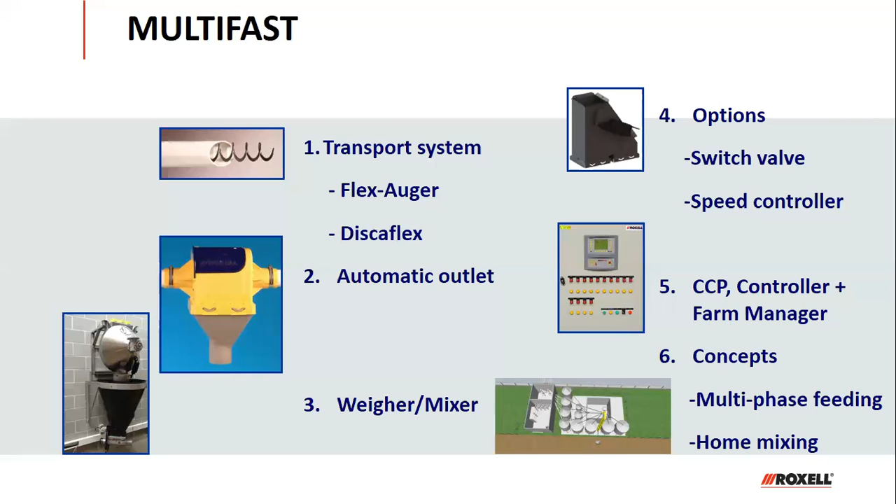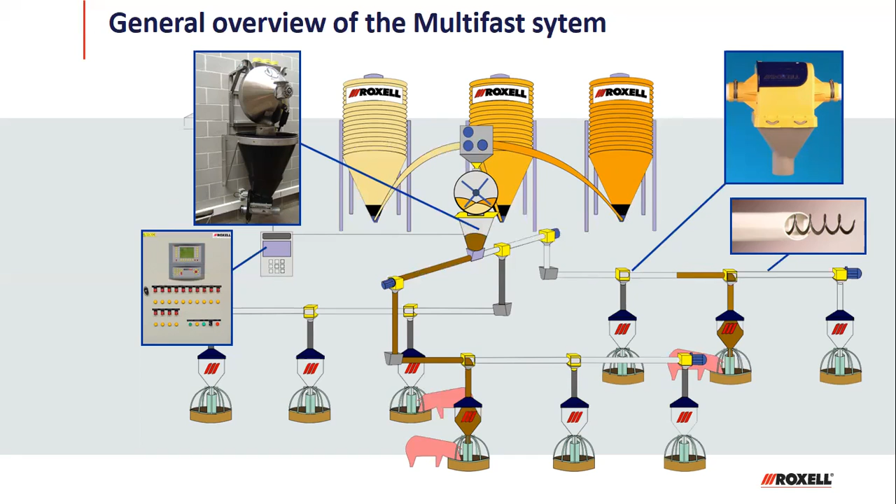Here you see a little bit of an overview. First of all, you have the storage bins. From those, different feedstuffs are delivered to the weigher mixer, which is centrally located. You also see that a lot of these pipes are empty, because normally the Multifast system always works with an empty tube system. It's only certain batches that will be traveling. Here you see it with flex augers and different sections, and if we can at the same time deliver feed in different sections, as long as they don't interfere with each other, we can do that to speed up the system. But I will tell a little bit more about all these things in more detail now in the presentation.

The transport system, the flex auger, we have different sizes of flex augers, starting from 56 millimeters diameter up to 125. 125 is also again introduced because of larger capacities that are needed.

The biggest capacity in transport with flex augers is 10,500 kilograms per hour with full tubes, but you need to deduct about a third if you're working with empty tubes, because the capacity will obviously decrease a little bit.

It's a system that's very robust. It's operational, you don't need to worry too much about it. We, as a company, give a 10-year warranty on augers and the tubing system. With straight lines, which we use with the multi-fast, there's hardly any wear out. Most of the wear out you see is in situations where you use bends, but that's something we try to avoid in our multi-fast system.

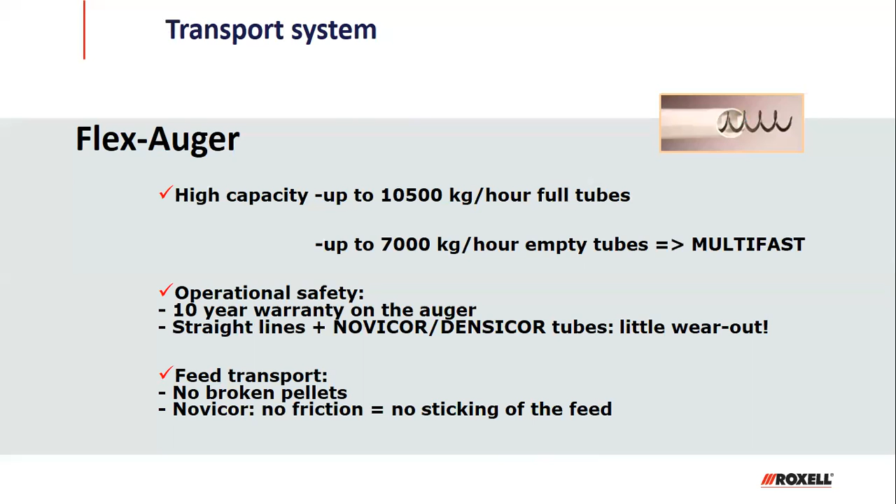The feed transport is very safe. With pellets, they hardly ever get broken. The Novicor is also a tube that doesn't attract the feed. It doesn't stick to the side walls. And also the dimensions of the augers and the tubes are really adapted to each other, so that there is no feed left over in the tubes.

As I said, it's an empty tube system. There's only certain batches that are traveling within the system. And here you see on the picture, you see how we do it. You could sort of say we can do this with a bend, but then you get more wear out on the system. We use it more like that with a feed box where it goes from one line to the other. This also gives you a large flexibility in designing the system. You can change directions, you can add another section later on if you want to. All sorts of these things can be done.

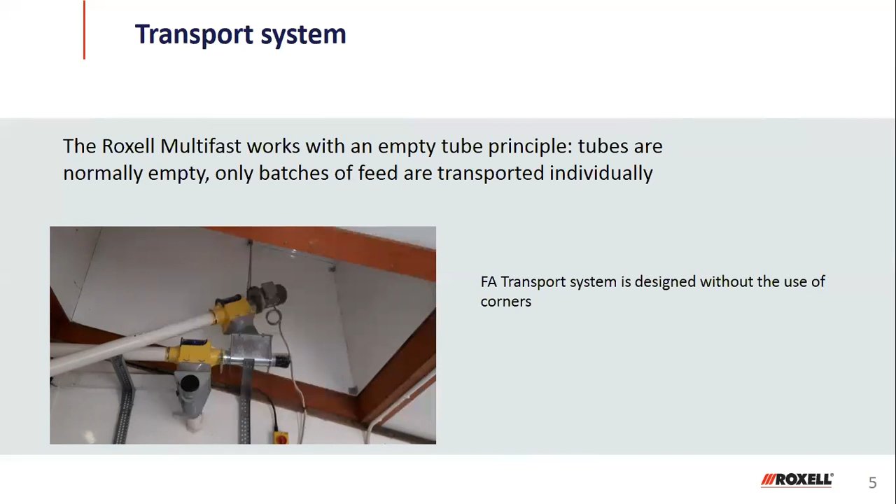This is a little bit an overview how you can do it with the chain system. The drawing is a little bit bad because it's not the automatic outlet which is in there, but for the rest it's fine. You have sort of a drive unit, you have corners, and you have the outlets, and the multi-fast feeds into that system.

More and more we see that people use on the side of the system a day bin which they fill, and that feeds into the augers into the chain system. But a small disadvantage with this system is that you always will have some leftover feed somewhere in the corners, and it sticks there for a little while, and then all of a sudden it can come loose and it needs to go somewhere. You really need to have a bin which takes care of this. And if you want to really work precisely in a research facility, I would not advise to use this for feed hoppers and things like that.

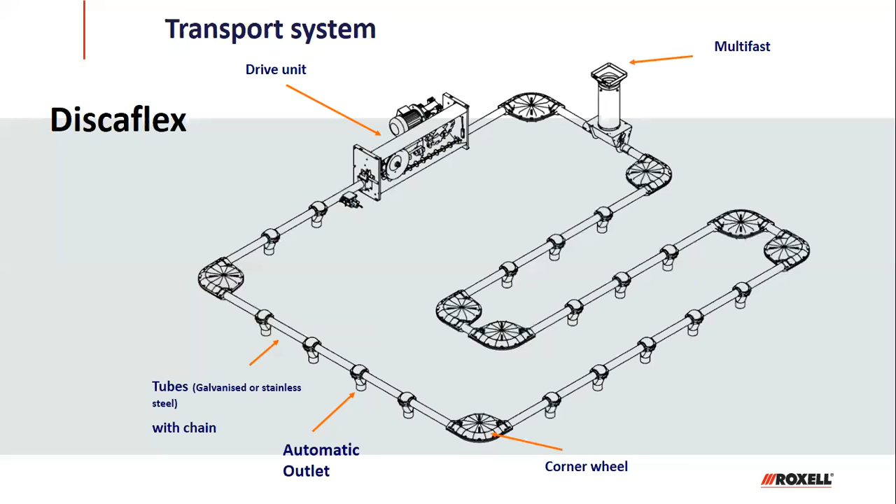You could use it with a day bin and then distribute it in sow crates or in the farrowing house. That can be done perfectly all right, because then another system will measure how much the sow will get each day. That's the opposite of what we were thinking in terms of clean out, but the corners are the problem. We have an option to have brushes in there, which diminishes the problem, but it's not completely solved. It's a very flexible system in terms of layout, but I would use it more like having a day bin in front of it which fills the system, and that system then distributes the feed to the different outlets.

So if you look at the two systems and compare them, if you're looking for capacity, certainly go for the flex auger system. Also, you have no rest feed, or hardly any. It's a system that can very easily be extended. It's easy to connect another flex auger to the system, and you just program them in, and off you go. It's not too difficult. And it's a more flexible delivery order. You can send a batch to the auger on the left hand side, and at the same time start another batch off to the right hand side.

So again it's about capacity, that's a lot less with the chain system, and also the problem there is with the rest feed.

So when you're talking about the 7,000 kilogram per hour delivery, is that based on the whole system or 7,000 down one line? No, 7,000 for the whole system. Per hour, but you work 24 hours, not just 10.

But I must also say, with the chain system, it's a very durable system. Since I've been working with Roxell, it's now 4 years, and I don't remember a problem with it. With some other systems you sometimes hear complaints, but for this one, it's one of the most reliable in the market, I think. The disadvantage is you can only send one batch at a time, because another batch going into the same chain, the same loop, is something the system can't cope with.

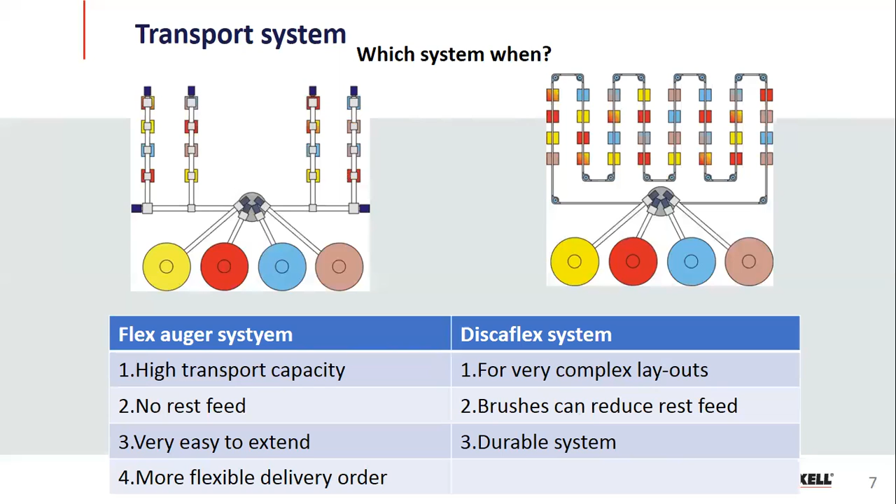We use automatic outlets, a type of outlet for each different type of tube. The size of the tube is adapted to, or rather the automatic outlet is adapted to, the size of tube we use. It's completely plastic, very durable and strong. I've seen some people put it outside, and we don't see too many problems with them.

Normally all these automatic outlets are closed, apart from the one that needs to be open. The feed delivery is programmed so the outlet opens well before the batch arrives, and closes a little while after the batch should have gone. At setup, it's all calculated - timing how long it takes to reach a certain outlet and so on. It's programmed in and checked, and once that's done, you can work with it and won't see too many problems.

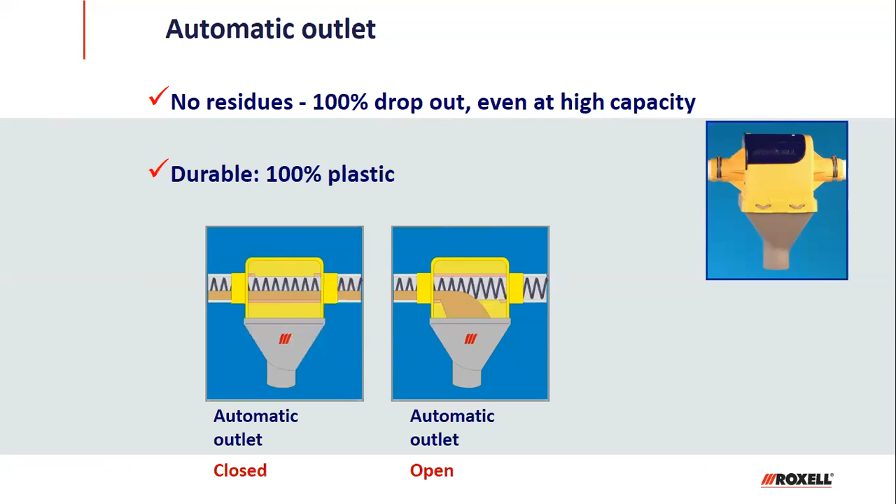With the automatic outlet, it can be connected directly to a hopper, like in the first picture, filling hoppers in a pen. Or you can work with day bins as I said before, just filling a day bin in front of a building. That can be a building operated with a chain system or a flex auger system - both can be used.

We have also improved the mixing capacity, the mixing ability. In the past it was just a rough mixture and we didn't pay too much attention to it, because we thought it will drop down, mix again, and then mix a bit more in the flex auger. That's all true, but for research facilities we now have the option for much better mixing.

For that reason we also replaced the load cells, which you see hanging on top there. The first ones we used were very good at weighing, but only dealt well with up and down movement. Now, with the increased mixing, we've added load cells that can also cope with pressure from the side, so that even in those circumstances the weighing stays accurate.

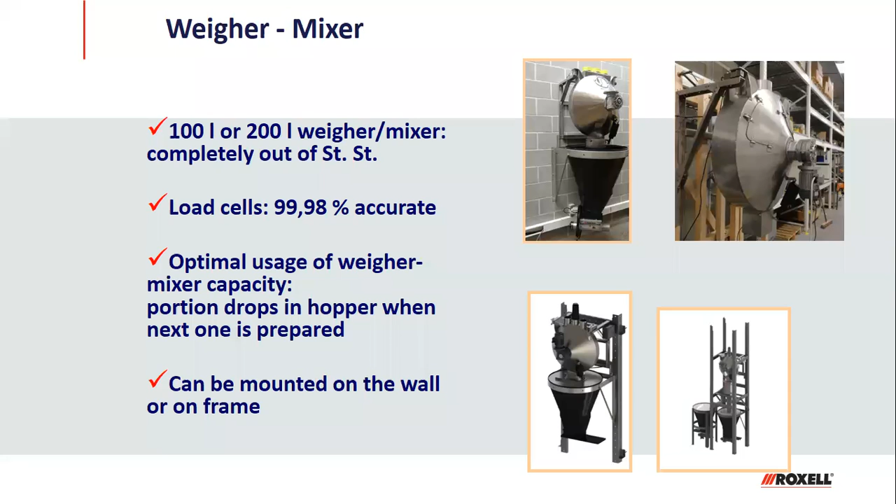If you're using lots of different ingredients, making a larger batch limits the time spent changing from one to another. If you're adding 30% premixes, a 100 liter can be used. If you're dosing 1 or 2% premixes, you better go to a larger batch, because it's always easier to weigh 1 kg than 200 grams on a system with flex augers.

Makes sense. Also, if you're just filling feed hoppers, the capacity needed is usually less, so you stick with 100 liter. If you're filling day bins, it's better to go with the 200 liter. I think the 100 liter is probably most of the applications we're thinking of - because of the number of pens and the size of the feeders. The 200 liter is really for capacity.

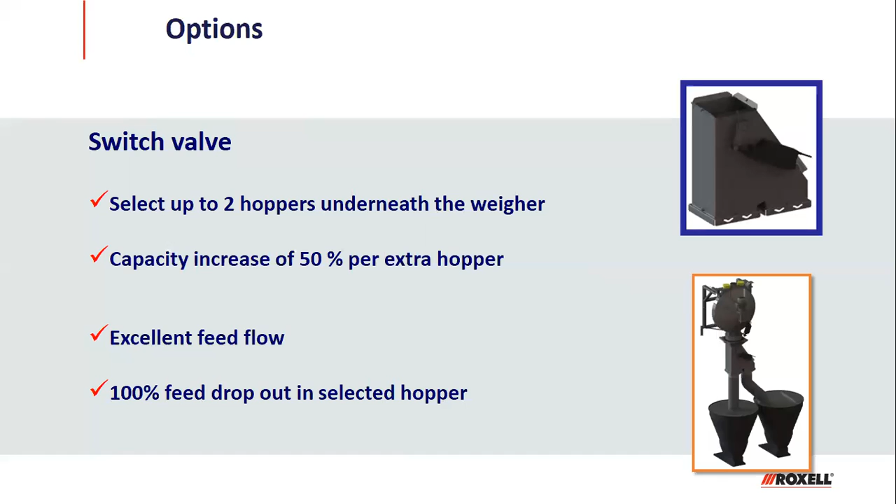So make sure I understand this - this is an option. So you could, if you were just going to use complete diets, you wouldn't need to add this option. Not really need it, no. Because a lot of the farms, they have a finishing barn, they have 3 silos in front of it, with a protein-rich diet, and one in the middle, and a less, and then mix it for phase feeding. Then you don't really need it. But if you really want to be sure, if you're doing what Jason was talking about, adding - then it's certainly a nice improvement.

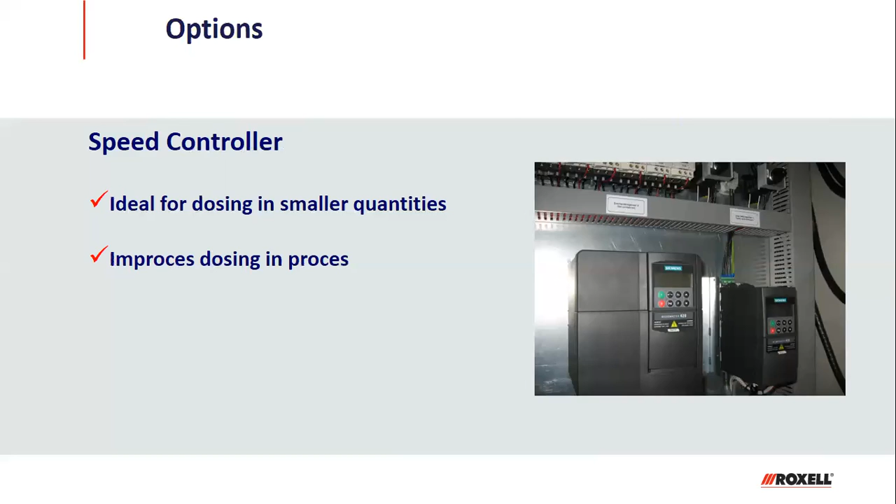Installation comes with the choice - when we deliver it worldwide, we let the farmer choose his language. So we have many languages in there, and it comes delivered correct. It's an easy installation because the box is completely configured for the setup with the layout in mind, so there's no difficulty. Just the installer or distributor needs to hook it up to the system.

Any chance you could get into this later - anything in terms of electricity with some of our site differences we have in the U.S. compared to Europe on 220? Yeah, that's all taken into account. You can run on it - we're selling worldwide, so we're dealing with all sorts of 60 hertz, 50 hertz, 220, 110, three-phase, one-phase. It needs to be set beforehand, and then the system is developed for it.

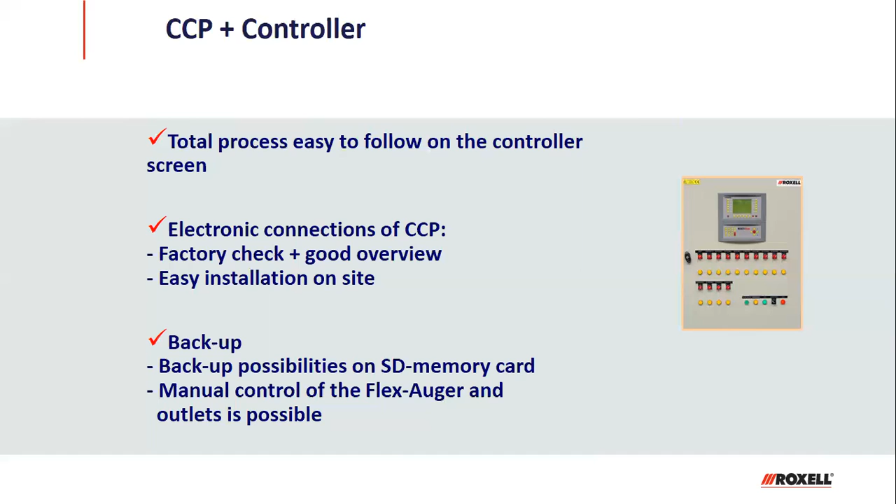This is just a little bit of the possibilities we have. As I said, the number of ingredients we cope with is about 20. Number of feeding places is about 496, taking into account that we need some automatic outlets for change of direction on the circuit.

Number of feed curves has gone up recently to 30. Each curve can have 20 bending points within it. We can have 20 routes and 30 sections. A route is one going in a certain direction, and the section is in between, where you have motors and extensions if it's a long flex auger system. On top of that, you can add some clocks for watering, lighting, and that sort of thing.

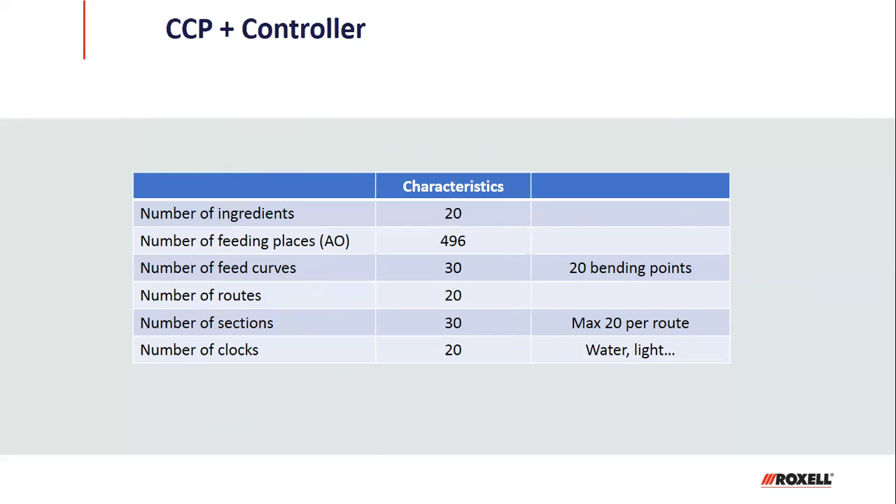And all these data can then be exported. So for that, we have the farm manager. It allows simple access to the data, but the main thing is that you can program in it what you want to do, and then use that program to export data to a PC, so you can have all the data read into an Excel file, and do pivot tables afterwards, whatever you want to do with them, and analyze the data.

So the farm manager is just to put in your feeding desires, cope and plan your layout, and then store the data and exchange them with the other management systems you might have.

That's sort of a screenshot from what you can see of a certain setup. You see all the different feed bins. If you feed into the system the feed deliveries, it will keep track of the amount of feed within the bin, roughly. You can also work with load cells under the feed bins, whatever you choose. You see the weigher mixer in the middle, the hopper.

If it's a live screen, you will see where it's active, where the feed is moving, if the weigher mixer is mixing, if there's feed coming from one bin or another, you can see it all on the screen. So it gives you a clear overview of your setup and what's actually working at that moment in time.

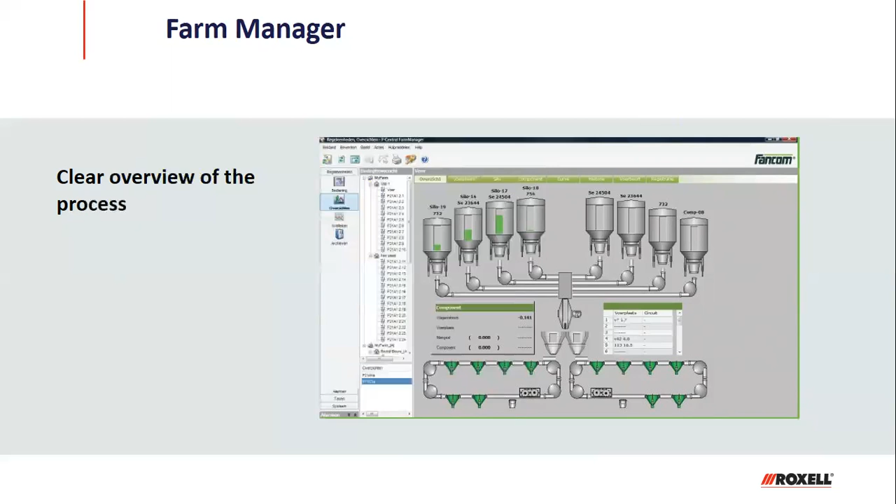Can I ask you, on your screens right here, you have the Fancom name up here. So the connection with Fancom and Roxell? It's a sister company. So it's a full sister company, we belong to the same CTB group. So we exchange programs with each other, we work together. They are more specialized in ventilation, heating. We are more specialized in feeding systems. Okay, perfect, thanks.

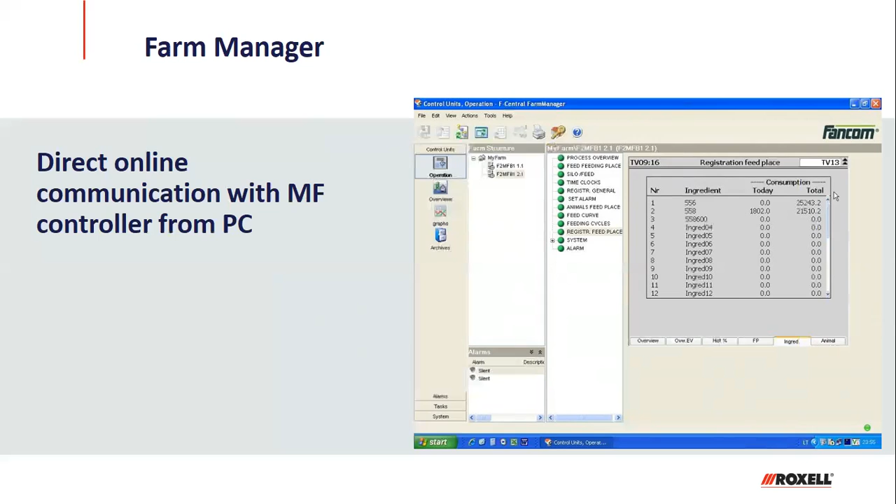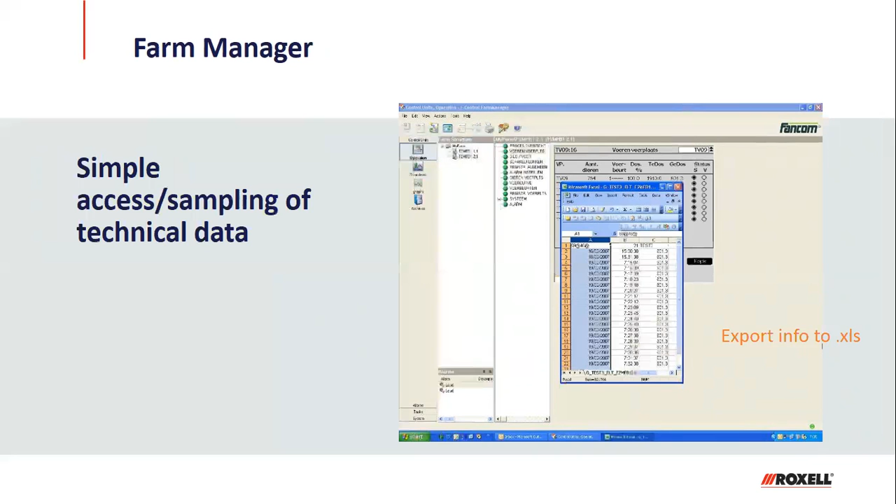Obviously, farm manager controls the multifast. It communicates with it and can also be seen on a PC. It allows simple access for data, sampling data, feeding into Excel files or other files you might use. It can control different multiple sites.

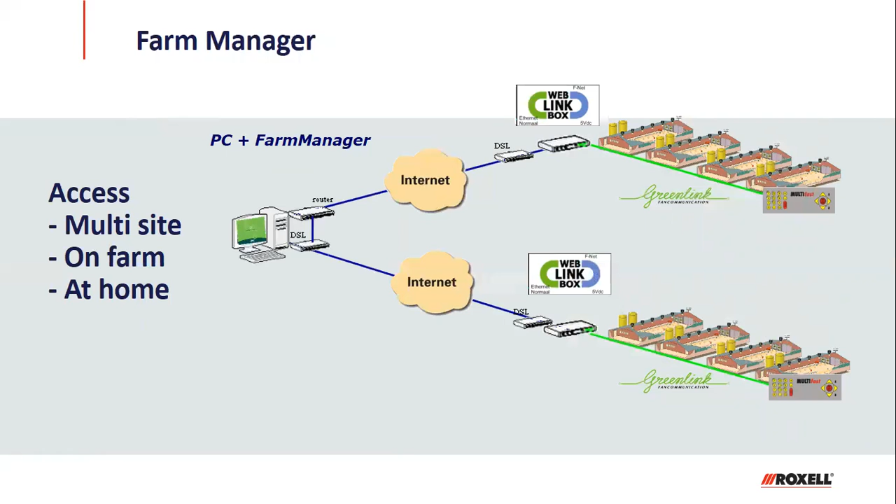So from one location, you can have a look at how the system is doing on different locations. On the farm, you can look at it. In the barn, you can look at your own control cars. There are different locations where you can look at the system, and each location is probably more appropriate for a different type of person. A farm manager will probably look more in the barns. Somebody overlooking the farm manager will look from his office, and that sort of thing. That's all possible.

For distance control, you need a farm manager. Export data, you need it also, sampling data and that sort of thing, and the personalized overview. So that's why you need the farm manager, but you only need one for your entire setup.

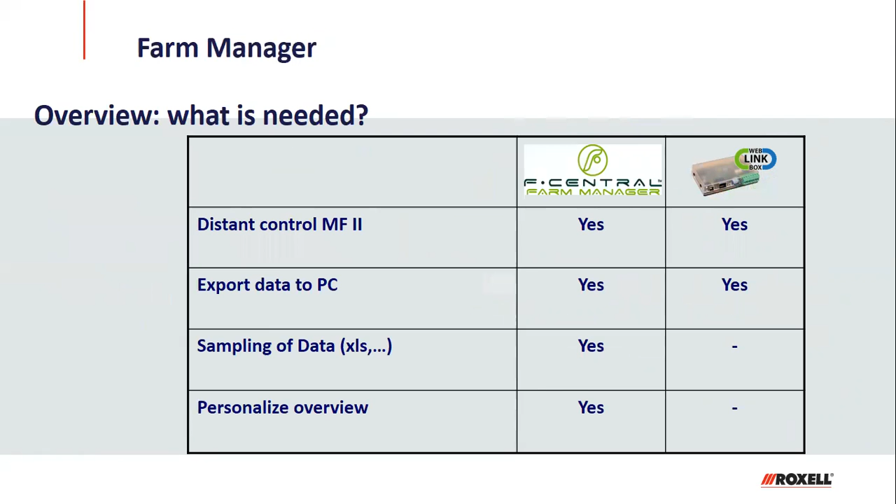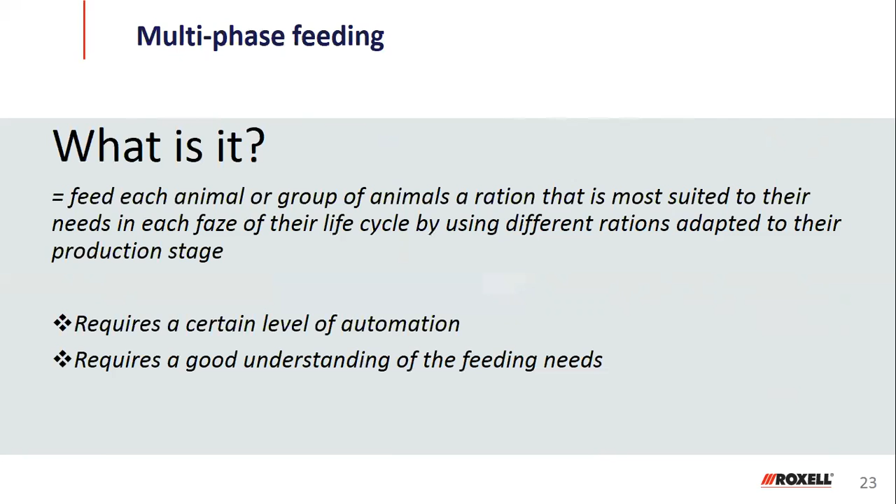I'll go quickly through this part of the presentation about multi-feeding. I suppose most of you know what it is: you want to get the right type of feed to the right location, to the right pen, adapted to the life cycle of the animal, the weight, the age, with the aim to reduce feeding costs and optimize performance.

We see that more and more feeds are coming into the picture. When I started working in pigs, we had one starter, one grower, one finisher, but now more and more people are fine-tuning. Sometimes because of legislation, people are no longer allowed to castrate, so immediately within the same barn you have two different types of animals which need different feeding strategies. Again, the multi-phase feeding, or the multifast from Roxell, can be an answer in developing the right feeding strategy for these circumstances.

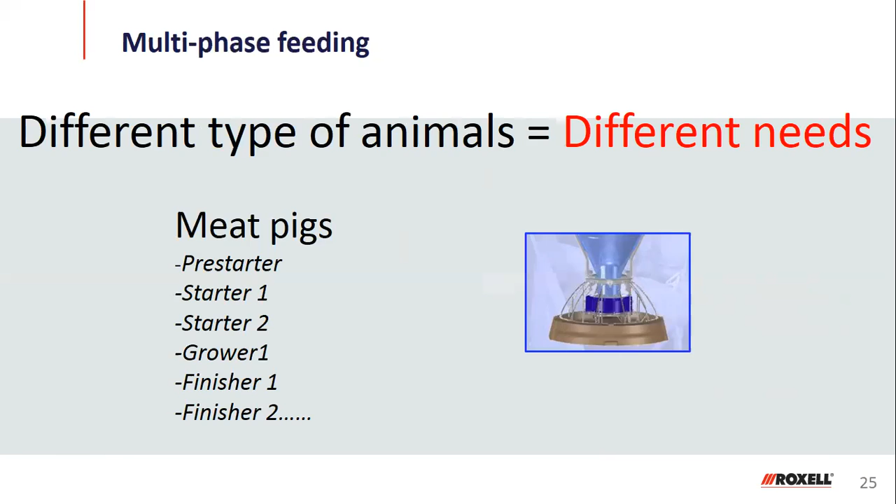What multi-feeding is like: some results show mainly that you use more of the cheaper feed, and that there is less excretion of nitrogen and phosphor to the environment. In countries where there's a lot of animal production, or in regions where manure cost, because of legislation, is going up all the time, it's also a selling point. People have to use it, and things like that. Again, there's less nitrogen coming into the air, so those systems need to work less as well.

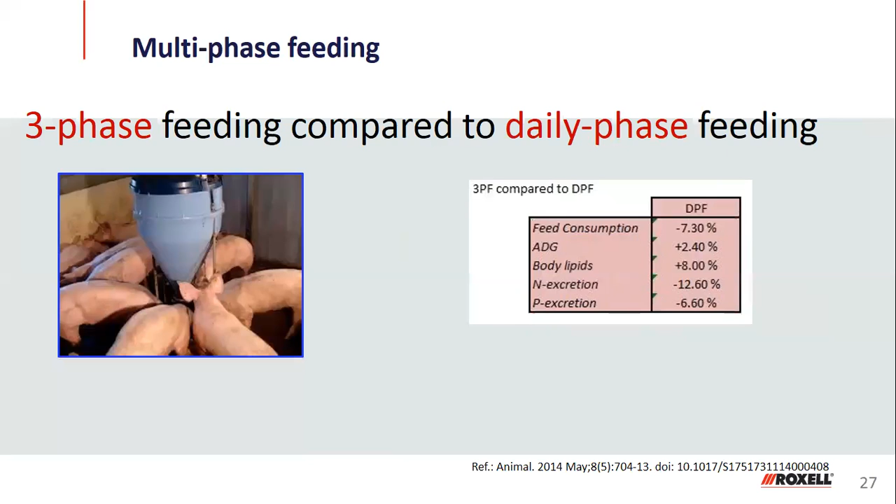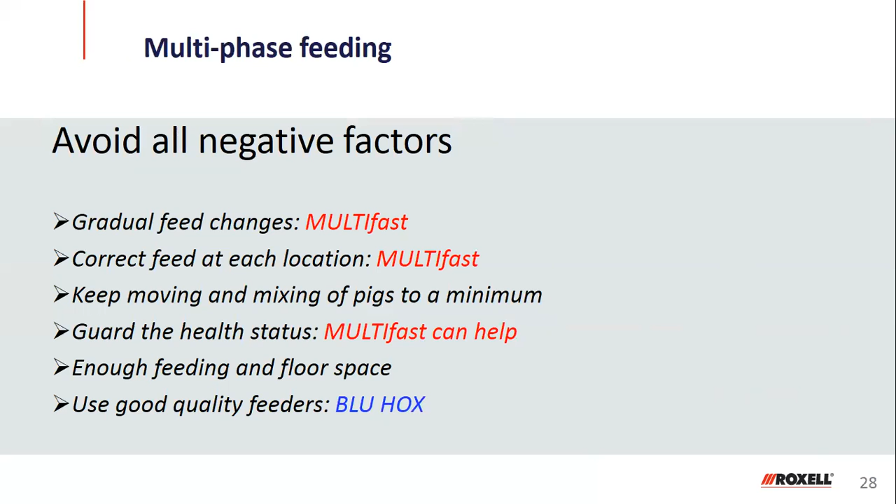So the multifast is an answer in this type of setup, where we can use different ingredients. Some farms just buy three composed feeds and then mix them during the lifetime to always have the right sort of feed available. Does it feed them by time or by kilograms? There are two options, which I'll come to in a second. Obviously, this is needed, like I've said before: the transport system, auger, a mixer, controller. But then we have two possibilities.

You can either choose to dose, which is a system where you send X amount of kilograms or pounds per day to a certain outlet. Or you can have a system with a sensor in each outlet, which is going to ask for feed. When it drops below a certain level, the sensor will send a message to the controller, and he will organize then the feed delivery to that outlet. So those are the two options we have available.

My question is, with that second option, which makes sense to me for a lot of our applications, can you tell it, for example, I want 6 kilograms of this diet, and when it's done feeding that 6 kilograms, it moves to the next diet automatically? That's something you need to put into the feed, yeah, curves, you put it in. But some of the systems in the market will only do it by days. You can't tell it I want 6; I have this budget of so many kilograms per pig all the way through. That can be put in, but it's a bit more complicated.

And for research barns, you would definitely want the second type, because if you're defining an amount per day and that feeder can't handle it, then it's diverted to that feeder each time. And once it's full, what happens in those cases where you sent 50 kgs and the feeder only needed 40? The feed goes up in the line, it goes to the bucket at the end, it just clears it to the end of the line. So we'd want the sensor.

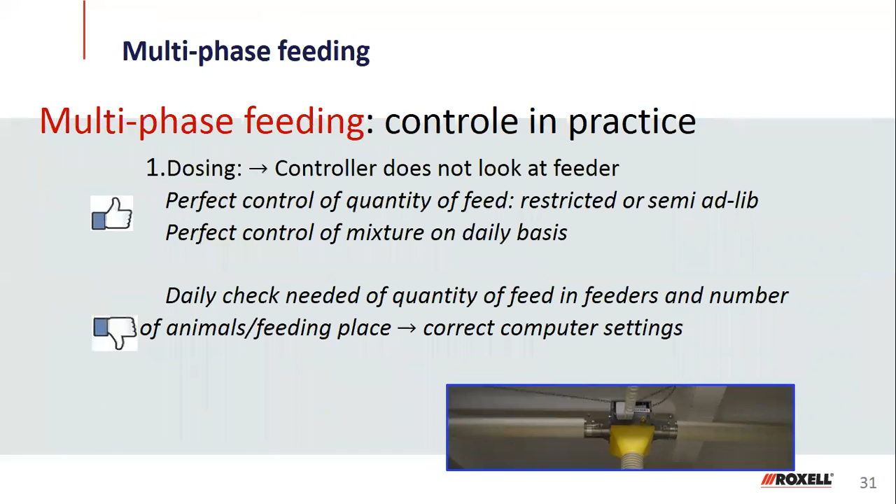But those are the two options, and they both have disadvantages. If you want to restrict feed, it's obviously a bit difficult because you need to go around all the time. With the registration system, restricting is less possible - you really need to interfere yourself and overrule a sensor, that sort of thing. It's possible, but complicated. If you're really into restricted feeding, like some genetics in some countries where they put on a lot of fat at end weight, then you want to restrict a little, and this type of feeding system is a bit more difficult to control. But with modern genetics, there's less need for that.

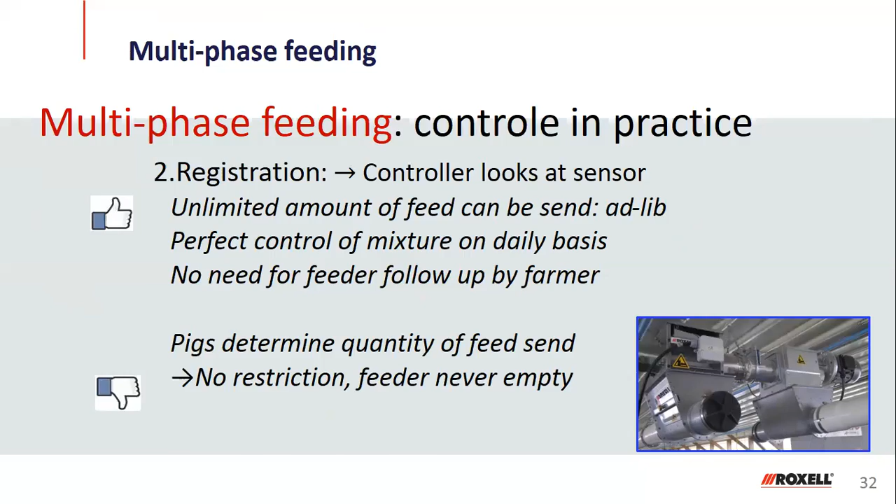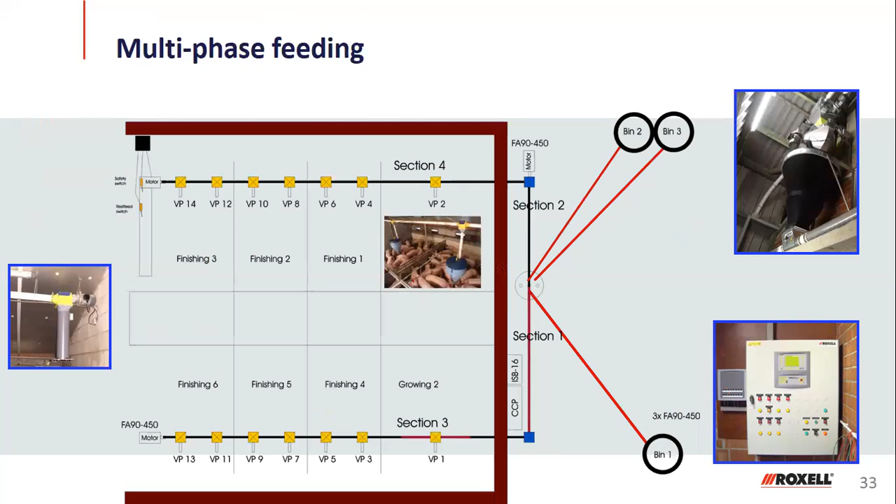Sometimes a little bit more complicated. One addition I should mention is that now we've also introduced that the weigher scoops can go left, and the next time they can go right. We can choose that as well, so the mixing is better and there's less risk of feed sticking somewhere in the weigher mixing.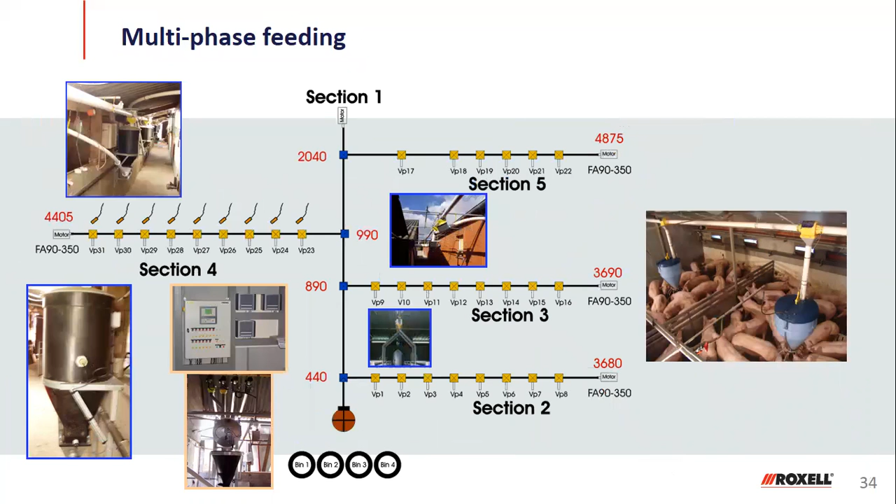The recent addition I'm focusing on more and more, because I see big possibilities for it, is using the system more as a home mixing system. For instance, in Argentina, they're already experiencing this - certainly in Europe there's a big drive towards shorter chains. They want local feedstuff used for production of local produced meat. They're looking more and more for replacements for soya from Argentina or the US or wherever they buy it. In Argentina, some people are already saying they're going to try to use it a bit themselves and produce pig meat. And pig consumption is going up in Argentina too, which is also a big help.

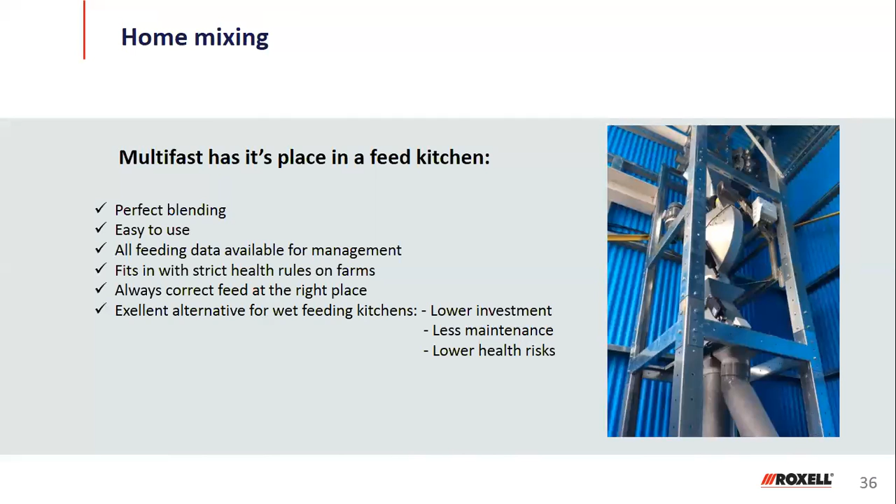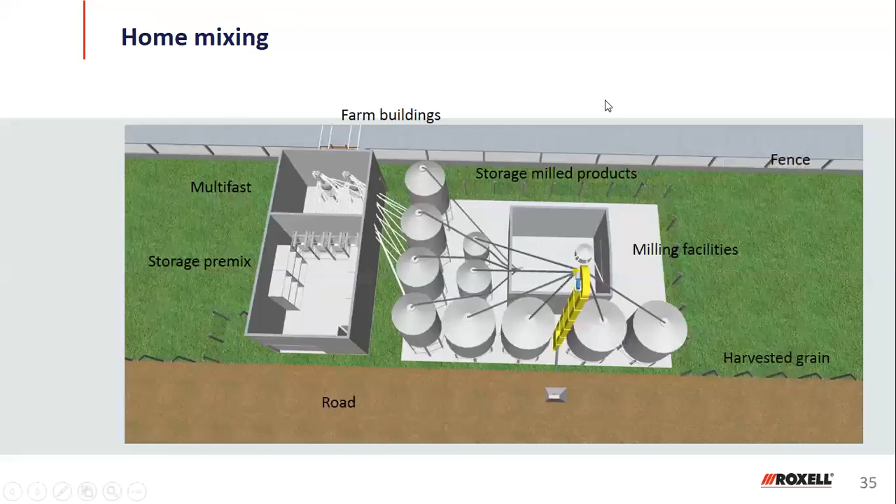Can we go back to that picture, Mike? I'm trying to get it. Which one are we trying to get to? Keep going back, there was a picture of the mixer just by itself, right there, maybe.

That would be sort of like just maybe 2 meters or something, yeah that's what I was going to say. Just the mixer itself, that round multifast mixer on top of that little day bin, is probably at least 3 feet in diameter, and then you've got another 3 or 4 feet underneath it. So that little system you're looking at right there is probably 8 or 9 feet tall.

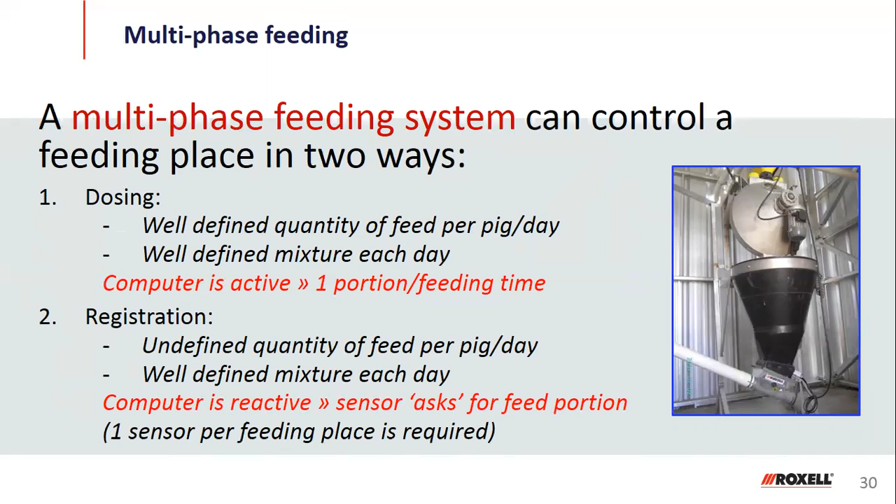Yeah, I was just thinking that, but this one with augers going into the top would probably be about the shortest one we've gotten these.

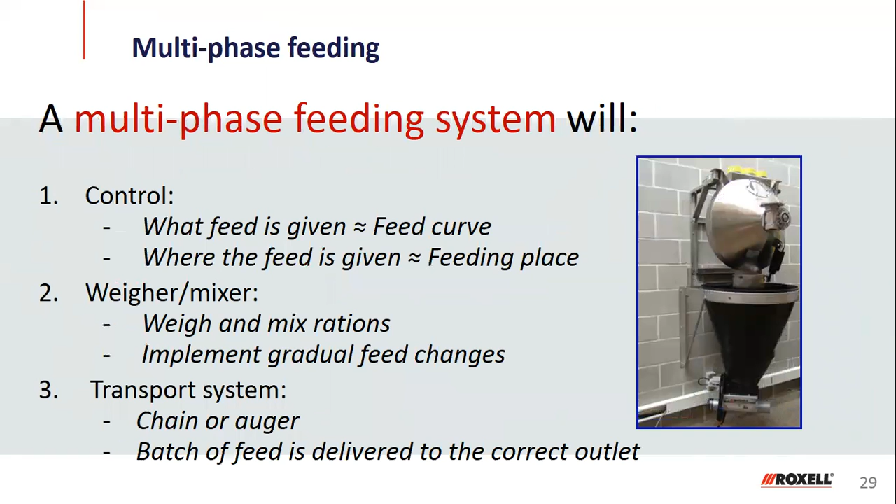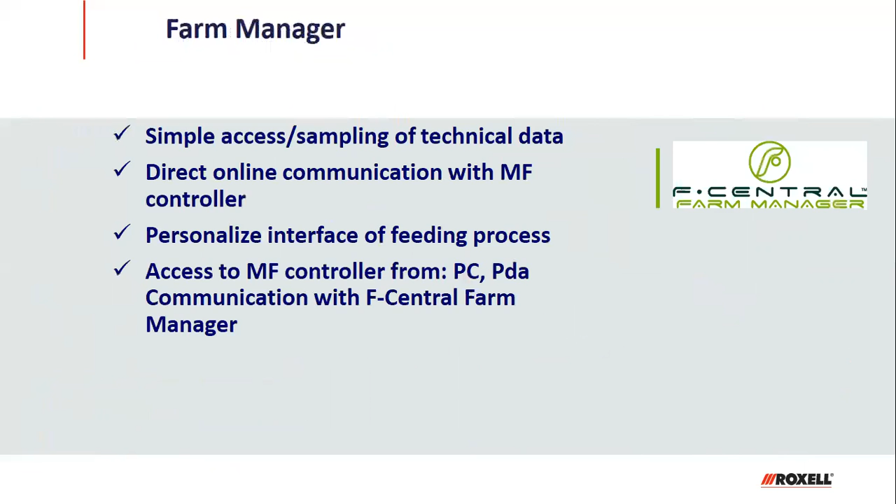Yeah, that's probably the one thing - I know we're still trying to figure out the kitchen area and that dimension. I'm not sure we have yet with Sunterra. Just when people call, we still got to figure it out with Carlos, see exactly where we're at, but we're trying to get a handle on what that kitchen area needs to look like from a size standpoint.

Well, the only thing we have right now is a 20 by 20 by 14 foot in height building, but that's as far as we've gone on that end. And whether we actually need 20 by 20 - I mean that's a big room, unless we use it for some other storage.

The other thing you start thinking about is, can you build this like we've done with the barns for the doghouse for the lines, where you don't need a 20-foot building the whole thing, but if you need to bring in a doghouse just for where those augers come in on top of the building.

That weigh hopper would have a belt that reversed back and forth and filled up a similar hopper to that black one there that would dump into a chain disc. So it would be weighing the left side while the right side is emptying - does that make sense? Kind of like a surge that it dumps into.

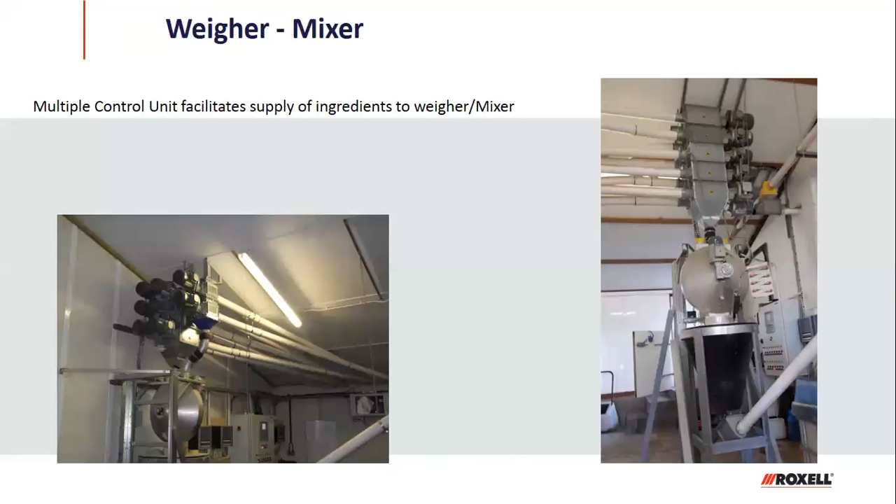We should probably go back to where you got it running through the system, dumping into the feeders. How do these solenoid lines drop down? I was trying to remember that from AgriSupers. So if you have 50 feeders, 25 in one row like this, you have a solenoid sitting in each one. Does that come up into a central point? How do you get all those lines back to the computer? It's going to be wired up from each outlet to the computer, so there'll be 25 cables running all the way back to that central point.

Okay, because that does become, I was just trying to think from the way with washing barns and stuff, that's going to be around that tube, we're going to have a lot of cables. I thought that was the way AgriSupers was doing it. Would you put that inside something, inside the tube, or do you just leave it?

Just talking about these cables, how big a diameter line? Just a little bitty one, like a computer cable, just a little cable. So you could put it all in conduit, yeah, a big piece of grey conduit, put it all in there.

Because that's the other thing we tend to see - these wouldn't be quite as bad where they're at, but what gives us trouble with our scales a lot of times is mice and stuff are a real problem with cables. Up high they're not as big an issue. I understand it's a European presentation here, and European kinds of styles of feeders and stuff too.